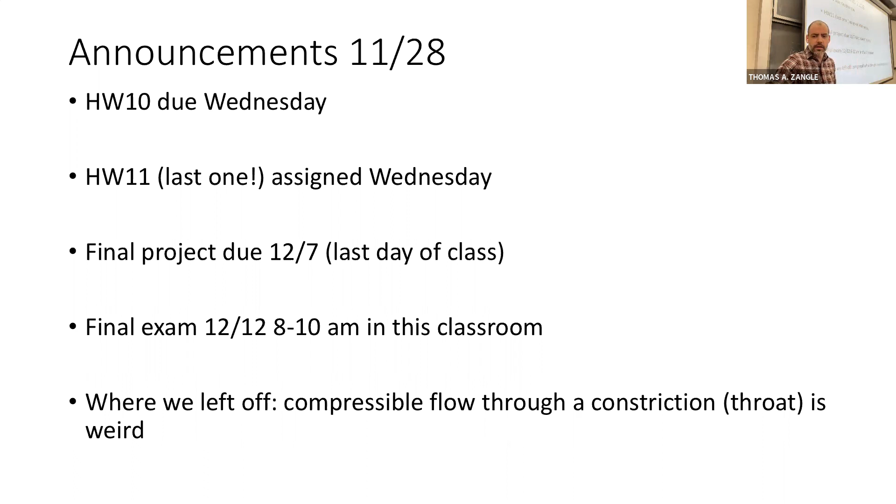But first, we have to finish off our discussion on compressible flow through a constriction. One of the things we discussed at our last class, Wednesday last week, was that things get a little bit weird when we have compressible flow through a constriction or a throat. So when we have compressible flow that comes through some narrowing of a duct, things can get a little bit weird.

Just as a reminder, we're now considering the case where we have flow through a variable area duct, like shown in the upper right-hand corner there. It will sometimes be the case, and we'll put more concrete conditions on this, that we can end up with subsonic flow on one side and supersonic flow on the other side. In that case, when we have subsonic flow on one side and supersonic flow on the other side of that kind of constriction, what we showed last week on Wednesday was that the Mach number must be equal to 1 at the local minimum of the area of the duct.

If you didn't see that, or if that's not ringing a bell, make sure you go back and review it. But we showed that the Mach number must be equal to 1 at the minimum if we have subsonic on one side, supersonic on the other.

Having that limitation that the Mach number is equal to 1 at that throat actually places an important limit on the mass flow rate through a duct with a variable area when we have compressible flow.

So to get there, we're going to start with mass conservation. Based on mass flux through this system, if we have a flow through some system with variable area, we know rho V A is going to be the same everywhere across every cross section. That means rho V A at any place within this duct has to be equal to rho star V star A star, where star means the value of those quantities at the throat itself. So the mass flow rate anywhere within the duct has to be equal to the mass flow rate through that throat.

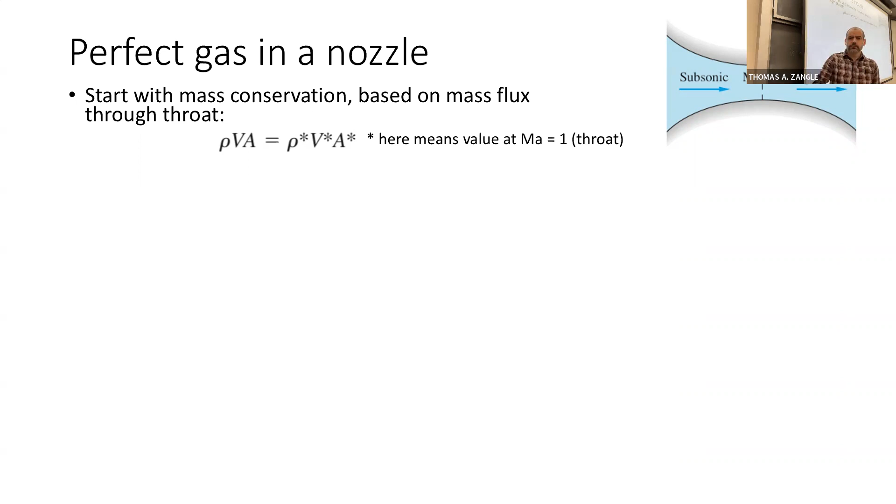And at that throat, we know Mach number is equal to 1, and so this will be a little bit convenient for us. Using the relationships that we developed for a perfect gas on Wednesday of last week, we can rearrange those. Assuming no shocks, so assuming for now that we have isentropic flow, we can then write out this expression.

We have A over A star related to Mach number at wherever we have this section A, K, the specific heat ratio, 1.4 for air, and here's Mach number again. So A over A star is really, for a given gas which has a specified K, just a function of Mach number.

So for example, for air, if we plug in K equal to 1.4, we have this expression for A over A star.

This means that if we have a duct where we know what the area is at the throat, if we know what A star is, and if we know what A is, the area at a given location, then we can use this expression to figure out what the Mach number at that location is.

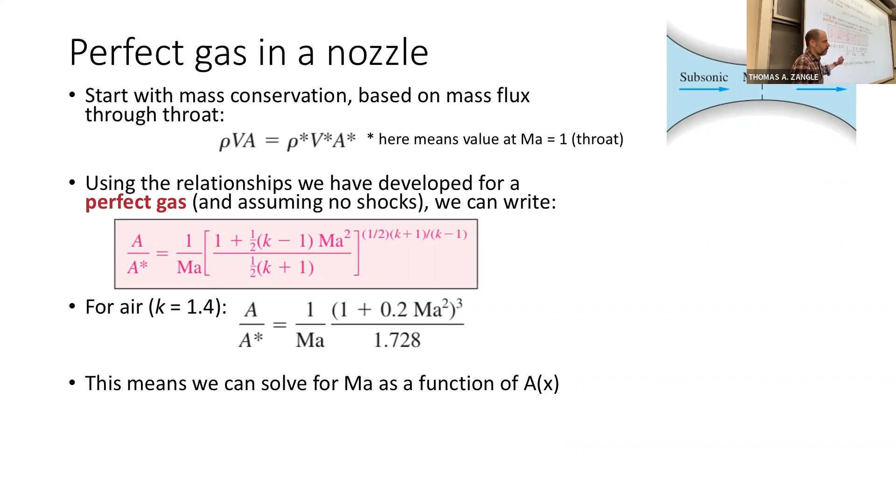This allows us to solve for Mach number as a function of A of X. And then once we know Mach number, if you remember from Wednesday, we can use our isentropic perfect gas relationships to figure out the pressure, density, and speed of sound and everything else we need to know about the flow, plotted again here.

Putting this all together, it means that if we know the area of a duct as it changes shape, then we can use these relationships to step through and solve for all of the different variables that we might want to know. This is going to be central to how we solve problems for variable area ducts.

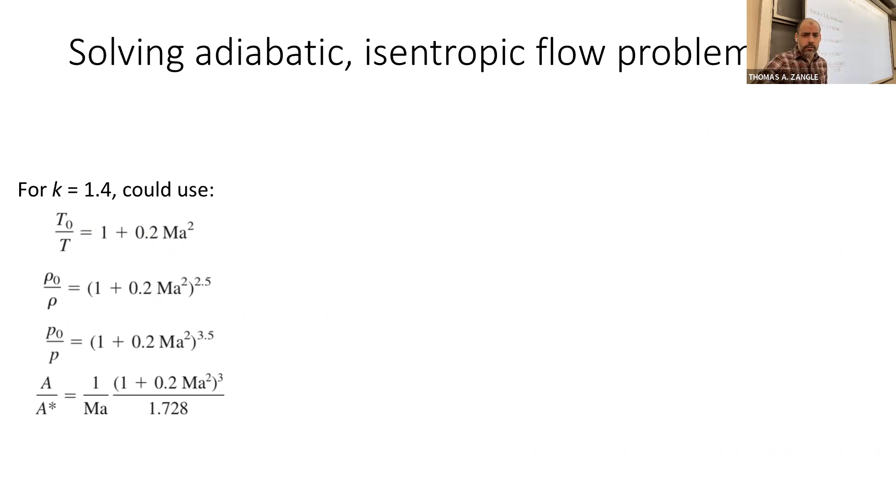So you can use, for example, this expression. You could use this chart if you really wanted to. You could use this equation and the equations that we wrote out on Wednesday, which are reproduced here. Or you can also use these compressible gas tables to solve this kind of problem.

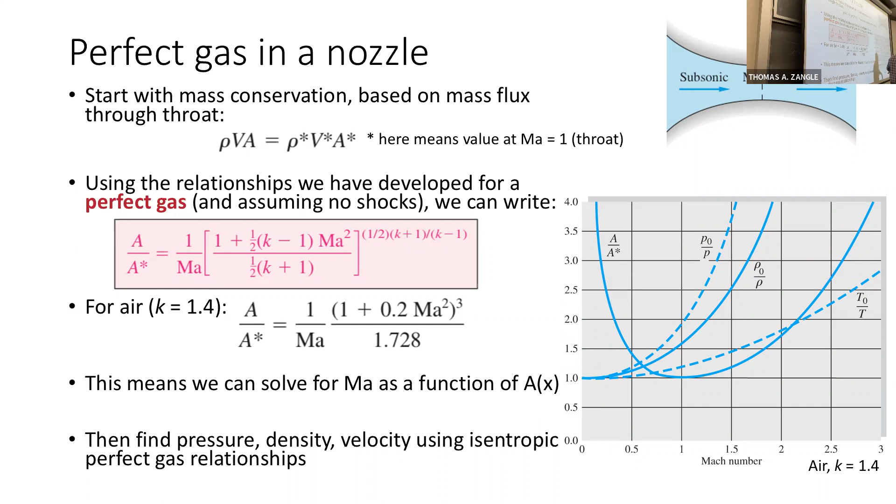And so you'll see on the table, there's one thing to be aware of: at Mach number equal to 1, A over A star is equal to 1, because A star is the area where Mach number is equal to 1. But A over A star increases on either side of this point. So in order to solve a problem using these tables, or even using these formulas, you have to know whether the flow is subsonic or supersonic in the first place. You have to know if you're on the subsonic side of the throat or the supersonic side of the throat. Yes.

Yeah, so if you have rho over rho stagnation, right, you can see it just always decreases. So there you don't have to worry about that.

Okay, so let's talk for a second about something else that's a little bit strange about supersonic flow. This is what's called choked flow. It's kind of like a punny name, right? So we said that the minimum area we call the throat.

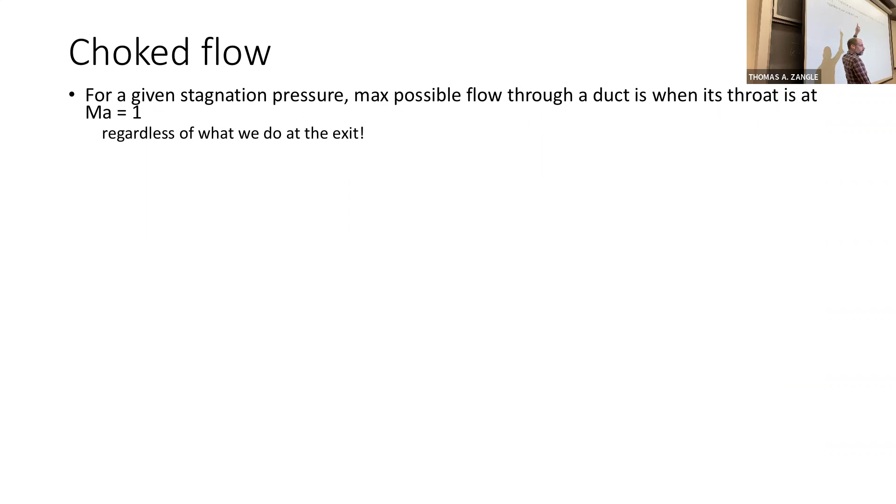And when the Mach number is equal to 1 at the throat, we call the flow choked. The reason we call it choked is that the fact that Mach number has to be equal to 1 at the throat sets a limit on how much mass you can actually get through a duct in compressible flow. So you can't increase the Mach number at the throat, it can never go higher than 1. So that means that the condition where we have Mach number equal to 1 at the throat is the highest possible mass flow rate that we can get through a duct for given inlet-outlet conditions.

For a given stagnation pressure, the maximum possible flow through a duct is when its throat Mach number is equal to 1, and this is regardless of what we do at the exit.

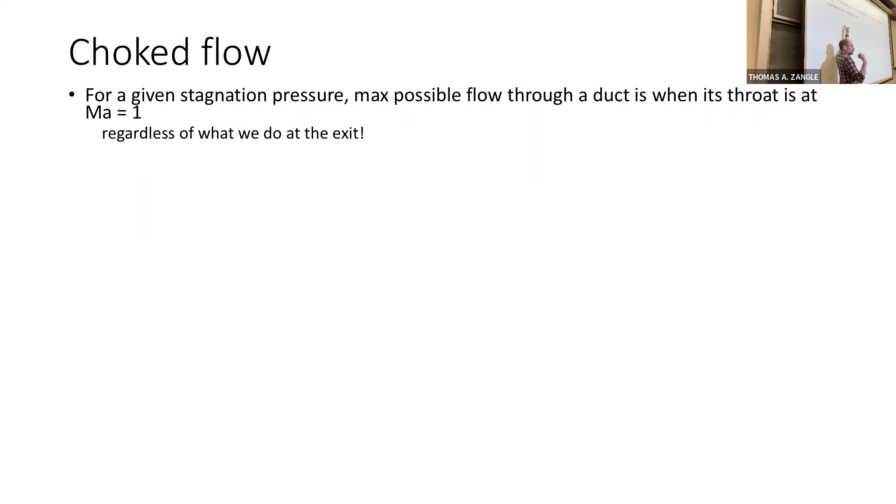So now let's just think back for a second to incompressible flow, like what our intuition would be. If we have a reservoir at a certain pressure and we're trying to drive flow through some duct to some outlet, if we decrease the pressure at the outlet, then we'll increase the overall pressure difference from inlet side to outlet side, and therefore increase the flow rate, right?

What this is telling us is that at some point, once we get to the condition where Mach number is equal to 1 at some constriction, we could keep decreasing this outlet pressure, and the mass flow rate through the duct will stay the same. That's what choked flow means.

We'll look at that in graphical form in a more concrete example on the next slide, but choked flow is another one of these kind of strange, non-intuitive consequences of compressible flow. So when the throat is at Mach number equal to 1, we say that the nozzle or the duct is choked. That's what that nomenclature means.

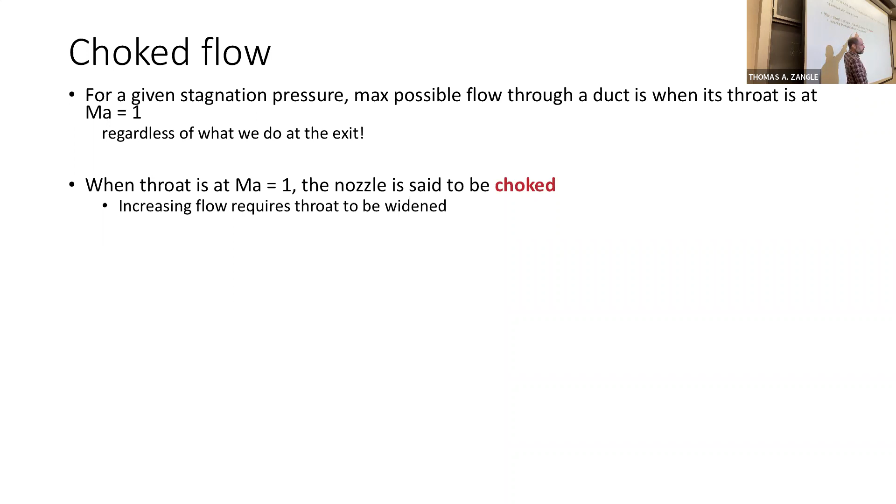So increasing flow would require the throat to be widened. If we have Mach number equal to 1 at any throat, we say it's choked. But not every throat will have Mach number equal to 1. We can have a throat that is subsonic, if we have not yet achieved Mach number equal to 1 at the throat. We're very rarely going to have a condition where we have a supersonic throat.

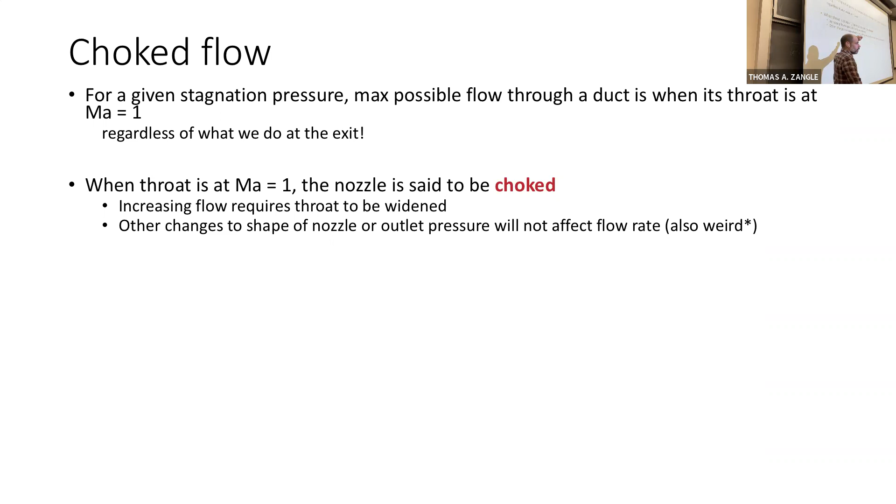So when throat is at Mach number equal to 1, the nozzle is said to be choked, and increasing the flow requires the throat to be widened. This means that other changes to the shape of the nozzle, for example you might have a rocket nozzle with some outlet flare that you're using to try to control the flow, if the flow is choked, then other changes to the shape of the system will not affect the flow rate. This is also a little bit strange from our incompressible flow intuition.

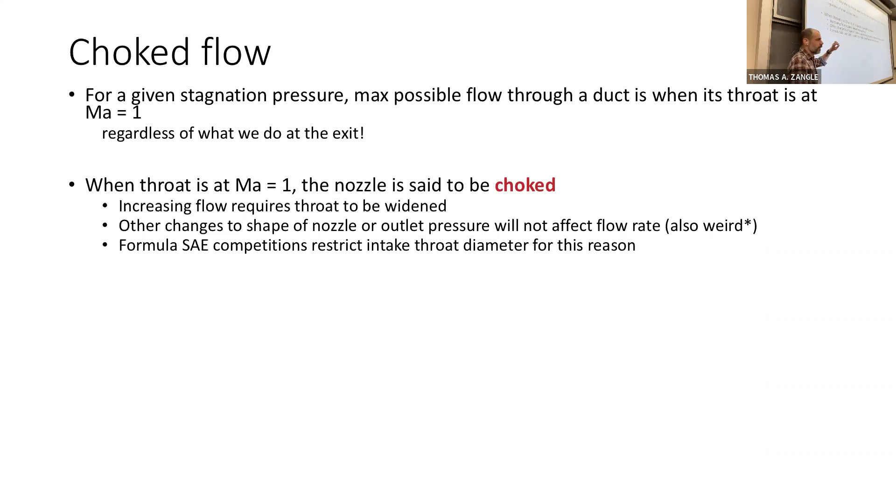So for example, like Formula SAE competitions, the college competition to build a race car, they will often restrict the intake throat diameter for this reason, so that way you have a maximum mass flow rate that everybody is limited to.

So we can use our relationships we showed on the previous slide in order to find the maximum mass flow rate for compressible flow through a choked throat. So m dot max is just going to be rho star, a star, v star, and we can solve for these things.

So in this case, this comes from our rho over rho naught expression. We can plug in our a naught expression, and then v star, this is going to be equal to the speed of sound essentially at that throat. That's where this comes from. And so from that, we can write an expression for m dot max.

If we plug in this for k equal to 1.4, we end up with m dot max, and we see it's a function of stagnation conditions, P naught and T naught, and A star, but nothing downstream. Those are stagnation conditions, P naught and T naught.

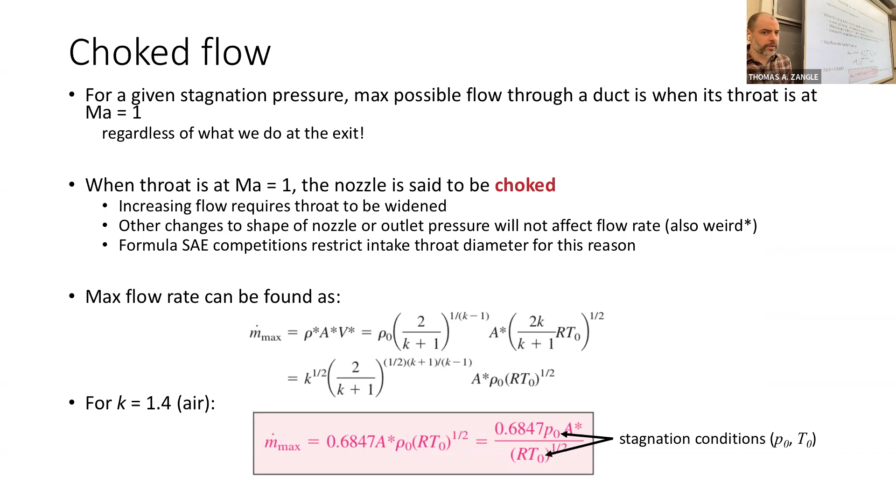So one potential example: let's consider a flow through some pipe with a valve, but now in the case of compressible flow. Previously we dealt with this in your textbook's chapter 6, but we confined ourselves to incompressible flow through ducts. Now let's talk about what can happen with compressible flow through a pipe with a partially closed valve. So we have a run of air or gas pipe, and someone forgot to open the valve up all the way. Now what's going to happen if we look at the operation of that?

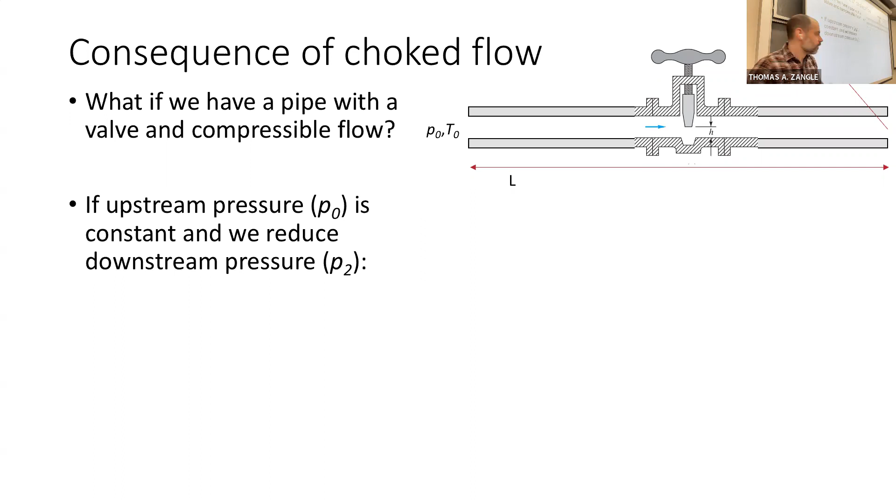Let's say the upstream pressure, we'll call that P naught, is coming from a large tank at some stagnation pressure. That upstream pressure is constant, and we're somehow reducing the downstream pressure, P2, using a regulator on the system.

And we would expect that as we increase the difference in pressure, as we increase the driving force, we're going to see a continual increase in the mass flow rate through this system.

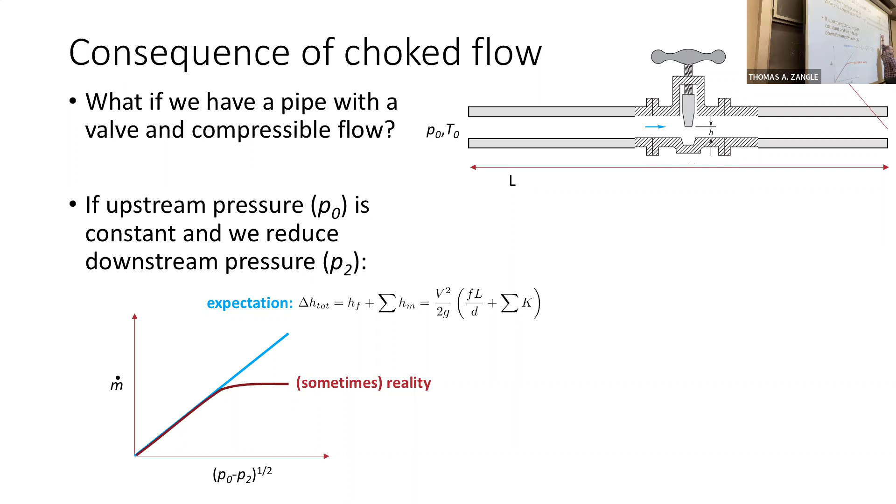At this condition, what's the Mach number right here? It's 1, because the flow is choked, so the Mach number is 1 right here. So what's going on here? This is choked flow. At this valve, where we have a local minimum in area, we would expect the Mach number is equal to 1, and therefore the flow rate doesn't increase any further.

Any questions on this? This is a little bit counterintuitive based on what we've learned previously. Okay, we'll get some practice on this. Yeah, you first.

Does Mach number equal to 1 definitely mean that there's supersonic flow? There is one condition in which it would not necessarily be supersonic flow, and we'll look at that in an example in the next couple of slides. We'll talk through in more detail what happens as we decrease that outlet pressure, in just a couple of slides. But that's a good question - almost always it's going to mean we have supersonic flow downstream, but there is one case in which not.

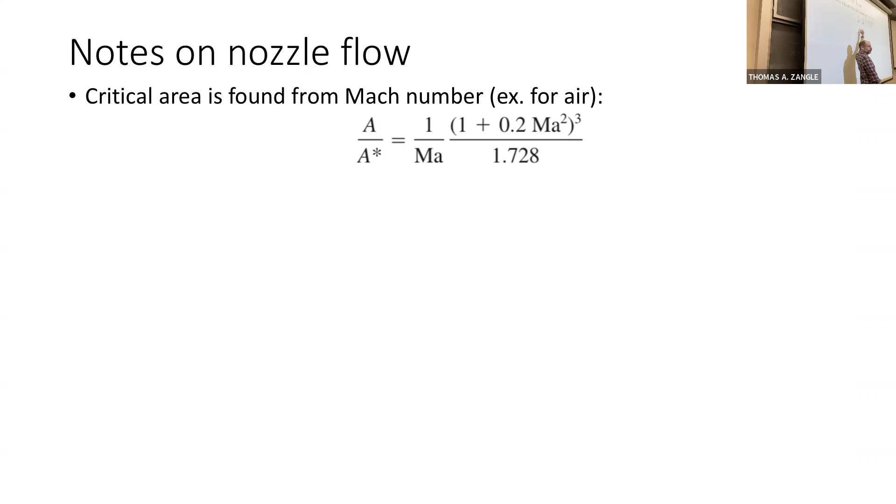We can find A over A star as a function of Mach number. So if we know P naught and T naught, we can figure out what the maximum mass flow rate is, for example, through a duct. But let's say we're given a problem where we have some variable area duct, and we know the conditions—the pressure, the temperature, or let's say we just know the Mach number at a certain point within a duct of variable area. If we know the Mach number at a certain section, we can find the area A star that corresponds to the throat, corresponding to Mach number equal to 1 for that given flow.

This is true regardless of whether or not the duct is actually choked. So not all ducts are choked, but all ducts have a value of A star where they would become choked. For any given duct problem, you can compute A star, but that A star may be smaller than the minimum area within the duct you're actually looking at. If the duct is everywhere larger than A star, the duct flow will probably be entirely subsonic. It could be entirely supersonic, but this is pretty rare because we're often starting from stagnation conditions at basically zero velocity. So if the duct is everywhere larger than A star, it's generally entirely subsonic.

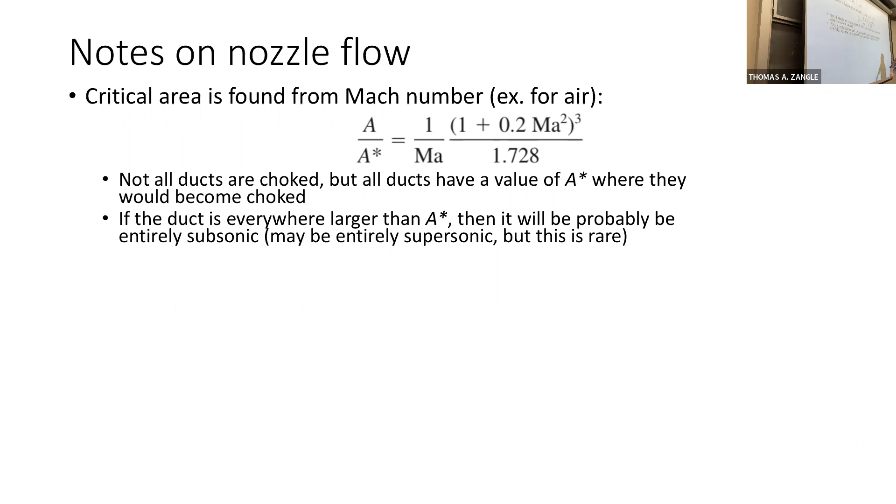Yes? Then there's something wrong with your upstream calculation. Yeah, if the duct gets smaller than A star somewhere, then you have an invalid solution upstream.

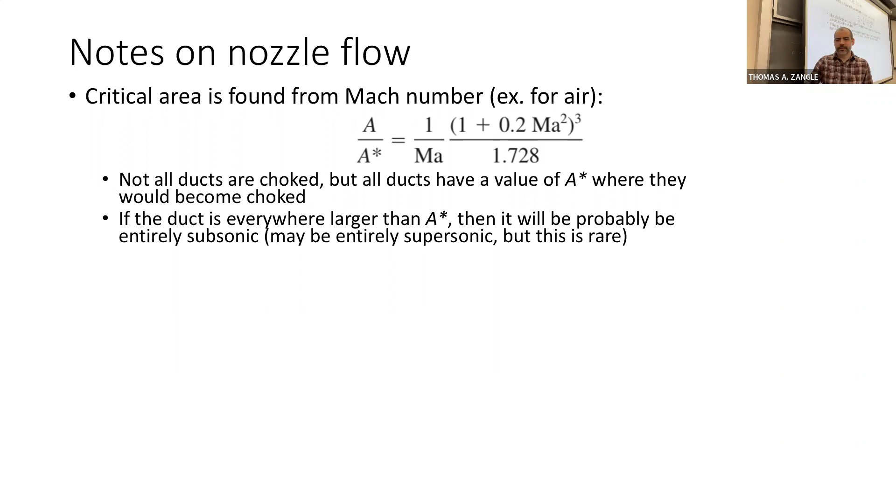For example, let's say we're trying to solve a problem with compressible flow through a duct of variable area. We know that we initially have a Mach number of 0.2 at an area of 1 meter squared within our duct. Then let's say we decrease the area down to 0.5 meters squared—we decrease the area by a factor of 2. Now, what is the Mach number at that location where the area is 0.5 meters squared? A straightforward way to solve this is to figure out A over A star for that initial condition, which you can do by looking up the Mach number of 0.2 on the tables.

Decrease A over A star by 2, decrease it by half. So you go from A over A star of about 3 to A over A star of about 1.5. Then look up what the Mach number is at A over A star of about 1.5, and you'll see that the Mach number at that smaller area is going to be about 0.5. That makes some sense? So that could be the minimum area of the entire duct, meaning the flow in that duct would never become sonic, would never hit Mach number equal to 1. But you can still use this concept of A star to solve the problem.

So at section 1, Mach 1 is 0.2, A over A star is approximately equal to 3, right, from the table, or you can also find that from here. That means A star is going to be approximately equal to 1/3 meter squared, about 0.33 meters squared. So that's telling us the area at which the flow would become choked, given conditions of area 1 meter squared, Mach number 0.2.

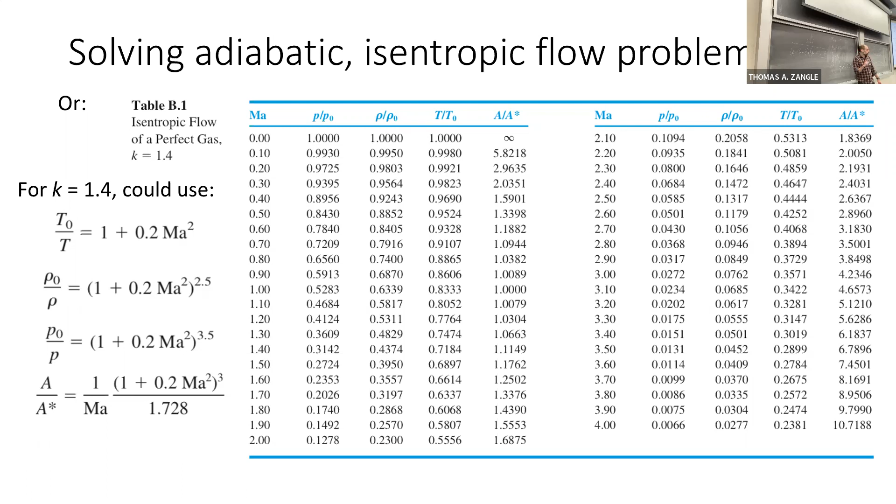All right, any questions on that? Okay, so that's going to be the general method of solving problems in this kind of a system. Just basically, once you know your Mach number, we can use this table to find our conditions relative to stagnation. We generally want to know Mach number, if at all possible, at any one of these locations. And we can use A star as a way of figuring out Mach number at each one of those locations.

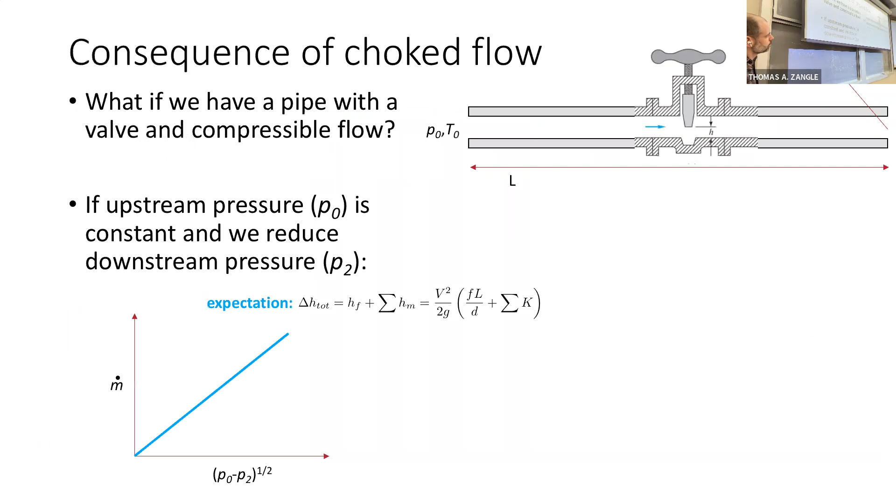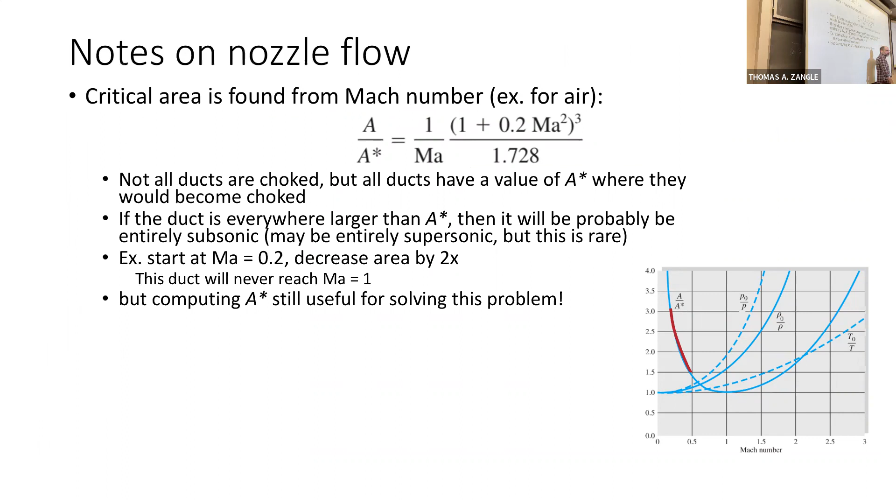So we saw how computing A star was still useful for solving this problem, the initial problem where the flow was not choked. Even though the flow never became choked, just knowing what A star is useful. And if the flow does become supersonic, then a shock wave can form, and we're going to deal with that really on Wednesday.

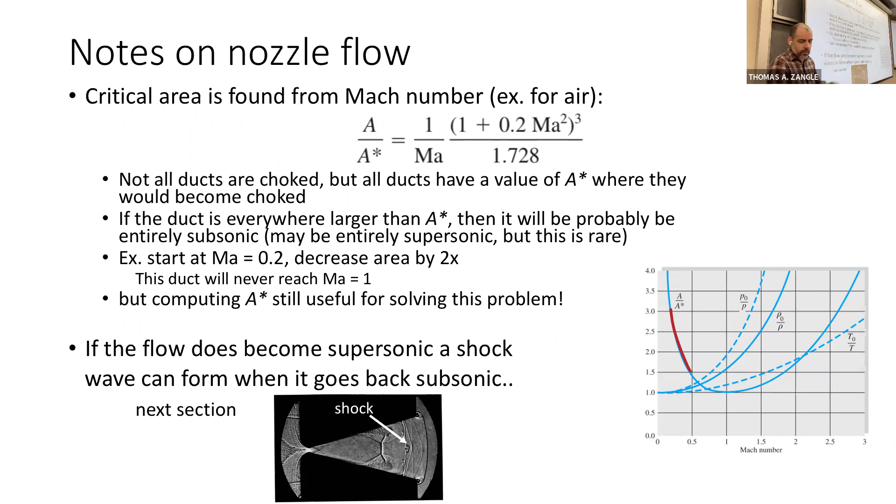So to continue our discussion, I do want to start getting into what happens as we change the conditions of supersonic flow. We're going to talk through what happens as we change through conditions of supersonic flow in some different cases. So we're going to consider, for example, a converging nozzle at the outlet of a reservoir.

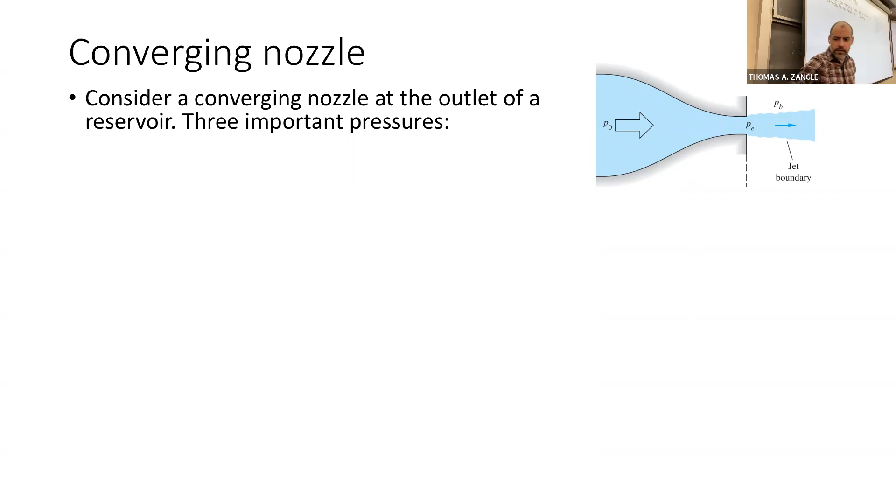There are three pressures that we have to keep track of in this kind of a problem. The stagnation pressure, so the pressure like really far upstream where the velocity is equal to 0, P naught. The exit pressure of the jet, PE, so the pressure that the flow is exiting our nozzle at, or our constriction at. And the outside pressure, atmospheric pressure, or we often call it the back pressure in compressible flow, PB. We're going to denote it as PB.

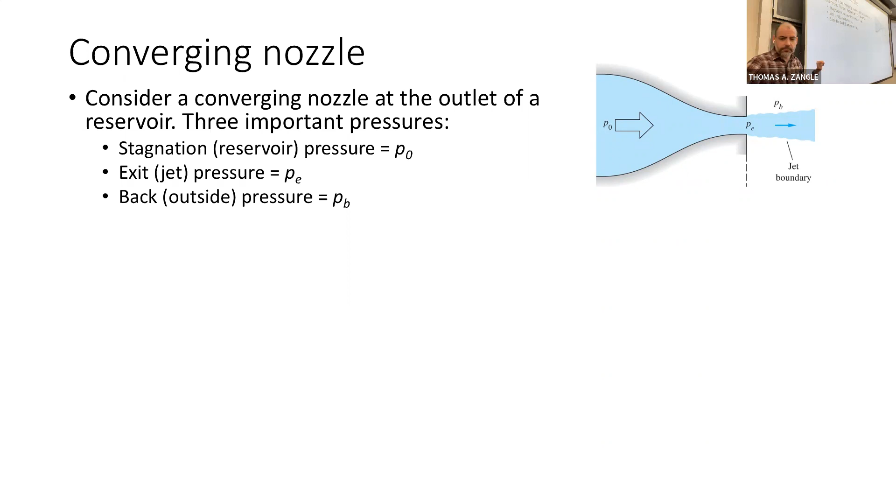For a subsonic jet, we said something about the jet pressure and the external pressure, all the way back to chapter 3. For a subsonic jet, they're the same - the exit pressure is equal to the back pressure. But when we have supersonic flow, that's not always the case. So we have to keep track of all three of these things.

But now let's say we're doing this by decreasing the back pressure. So we keep decreasing the back pressure, lower and lower and lower. From the subsonic condition, we're going to get to a point where we decrease the back pressure so much that we now have sonic flow - flow of Mach number equal to 1 at the exit.